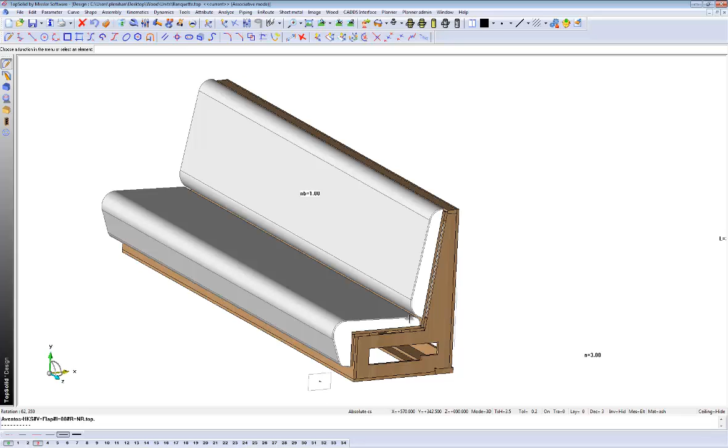Okay, so here I drew up a unit for one of our current clients using TopSolid Wood. As you can see, we've got rails here, we've got upholstery, of course, which you can draw, and it's all drawn in TopSolid Wood.

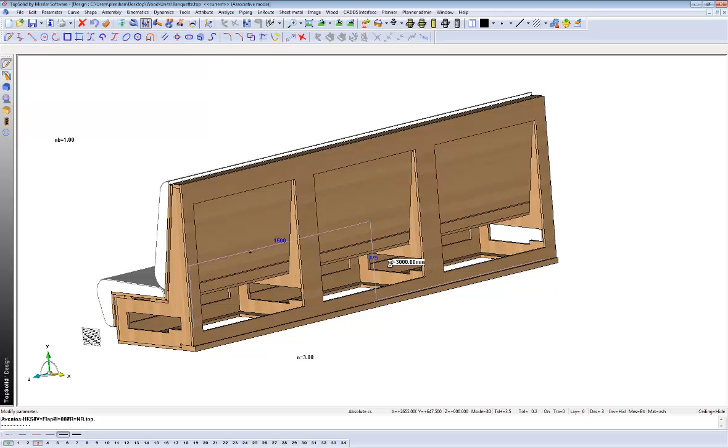Now let's actually make a few changes to this. The client wanted to change the overall width, but also change the number of rails here. So what we can do is maybe just modify this length to 4000 mils, and change it up. As you can see, it changes everything in place and changes it equally, the spaces.

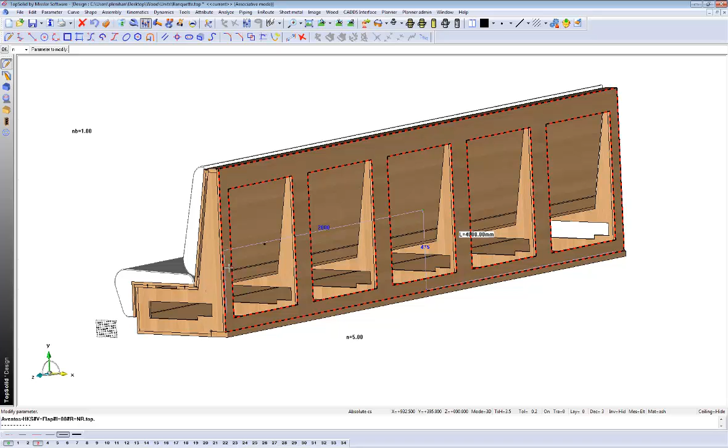What we'll also do is change the number here from 3 to maybe 5. As you can see, it adds in additional parts. That's pretty powerful, that it can actually add in all of these additional parts if you tell it to. This saves a lot of drawing time and also time in making changes to revisions and so on.

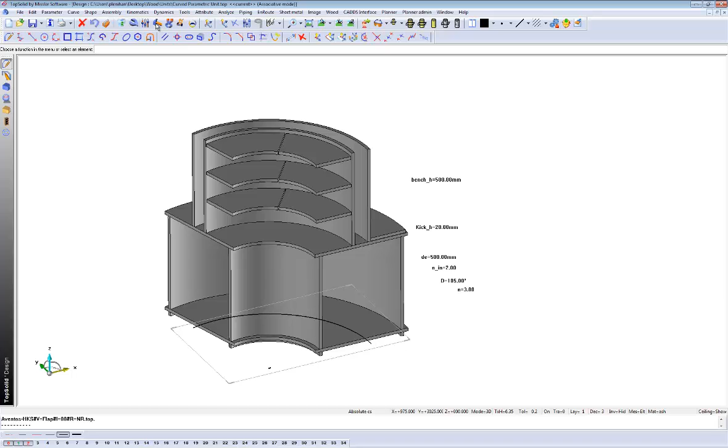Now next what I want to show you is maybe a curved unit here. As you can see, that was previously the unit that I was showing you. Now here, this is my curved unit and I've got different names here. So what I can do is I can click on any of these.

I can change the number here to 4, and again it adds in additional shelves, so I don't have to be redrawing and copying and pasting, and it equally divides the spaces here.

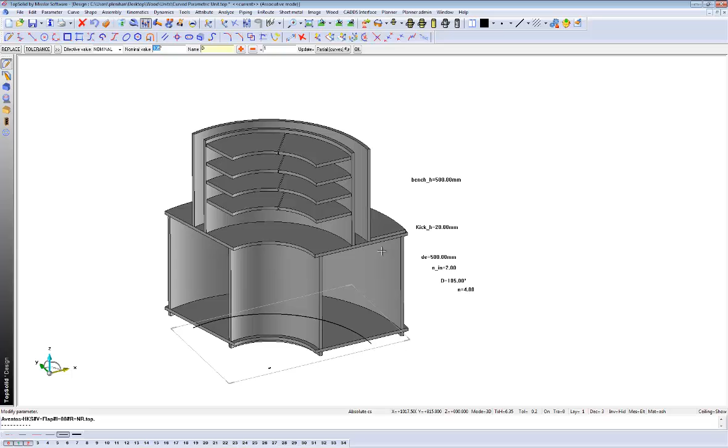So here, let's change the angle to maybe 180. There we go. Big change there. Let's change the number here from 2 to say 3, because we now want 3 shells here, equally spaced.

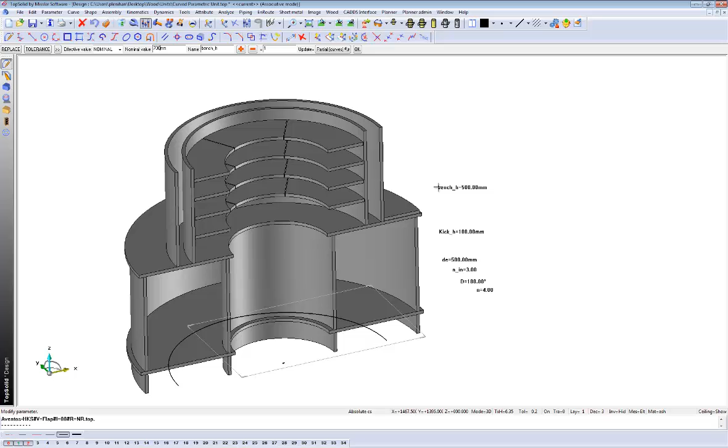Let's change the kick height to maybe 100 mils, as you can see here. And let's change the bench top height to maybe 700. There we go. So it's pretty powerful, the parametric qualities to this. Again, it saves time in that revision process, and also not just that, but it also saves you drawing time because it allows you to add in additional parts.

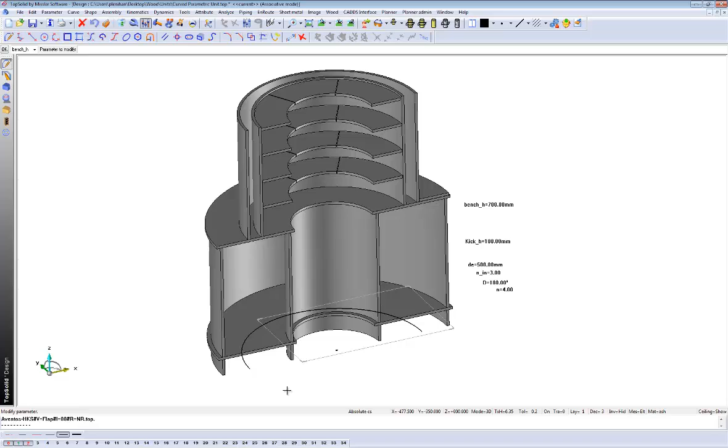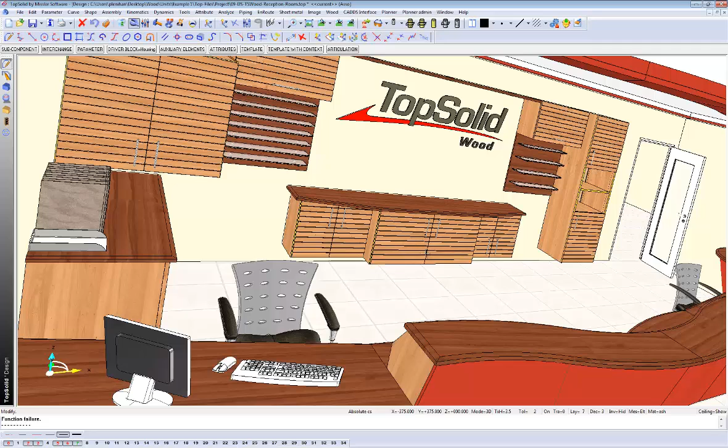Now these aren't just visual changes to the drawing, but if we just look at our see-through mode or wireframe mode, we can see actually the hardware in place also there. So it changes the hardware and also changes the machine.

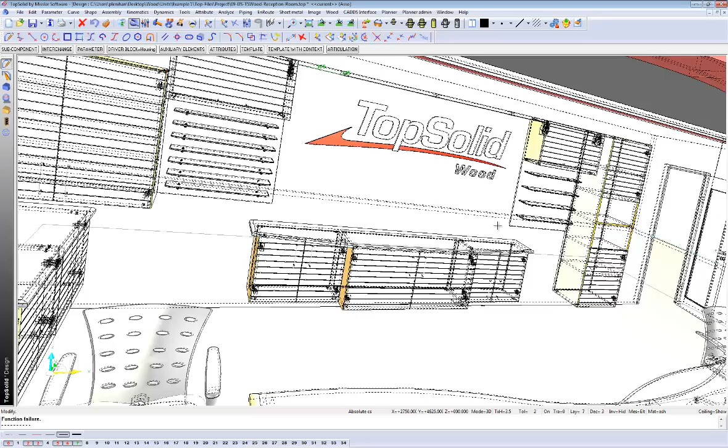What about if we want to make major changes to this drawing? Say for instance, change up the dimensions here. What we can do is I'll just turn everything on here. As you can see, we've got dimensions there. So I can just click on these dimensions and say for instance type in 600 and it will now change it.

Now not only has it changed this side, it's also changed this side because there's a connection between the two. What about this dimension here? We'll type in, say for instance, 750 mils, and it will now change also.

And maybe we'll make a change to this middle unit and we'll say 600 and wait for that change. As you can see here, it's brought it to 600 mils.

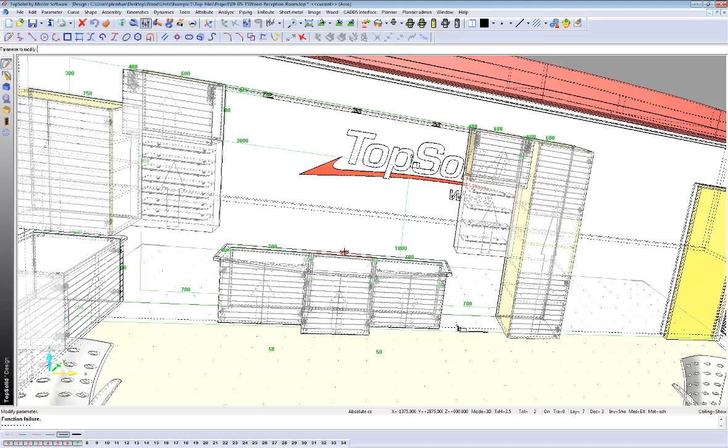Now this is just to give you a bit of an idea of what you can actually achieve with the parametrics here in TopSolid Wood, and how you can make changes, and fairly big changes, to the scene or individual drawings.

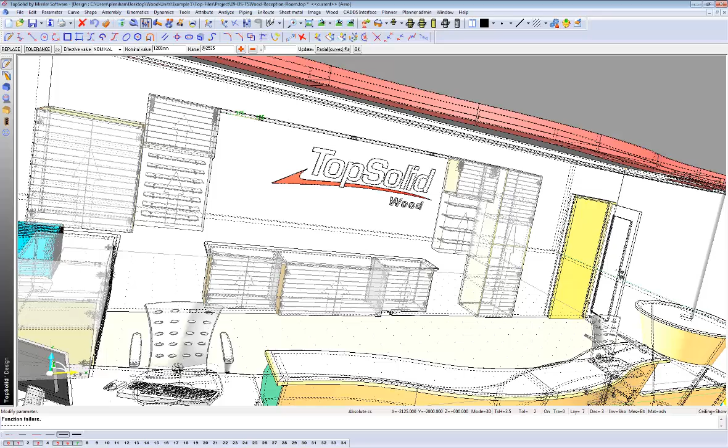And what I'll do is create a rendering. Okay, so let's just zoom out of here. And how you create a render is here. This is our area where we can pick a ray trace, which is a really good rendering. We can create our hand drawing view and various different options here. We can increase the quality and the radiosity here.

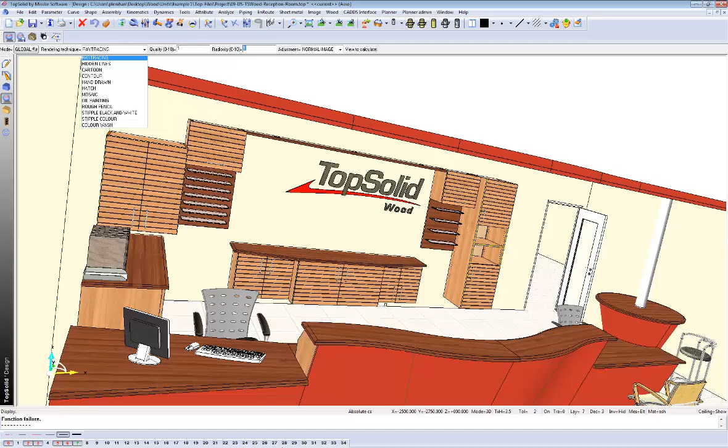Now what I'll do is I'll just open up one of these just to give you a bit of an idea of what you can create. So here, this is your hand drawn, you could say, sketch, and then this is the render mode. So you can create really good crisp renderings that you can present to the client then.

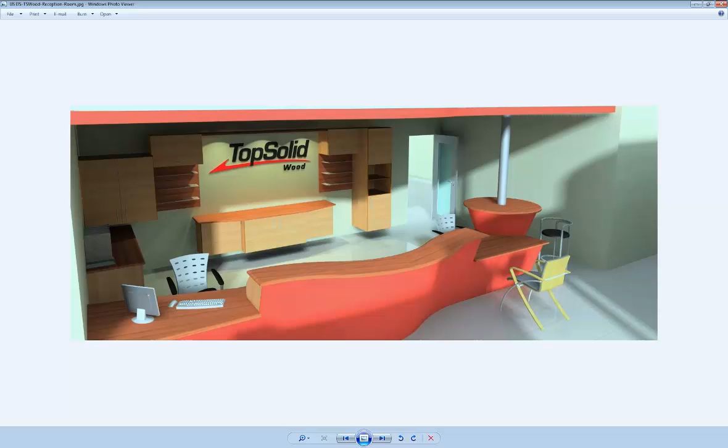Okay, so let's minimize that, and here in TopSolid Wood what we can also do is save as a 3D PDF, and we've got various different file formats here as well, like STLs and SketchUp and AutoCAD and CATIA and IGES and so on. You can see it here.

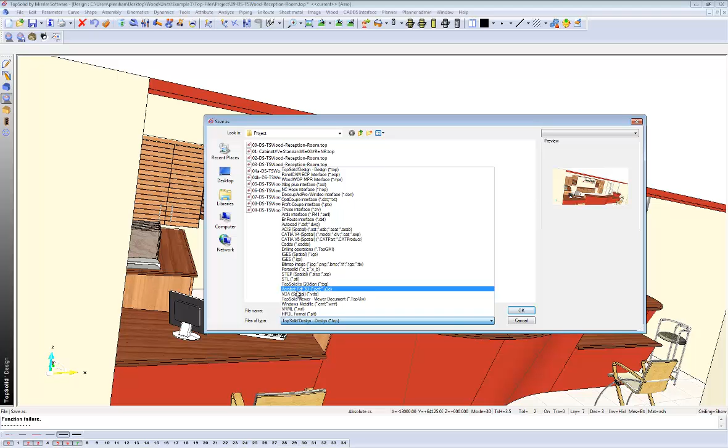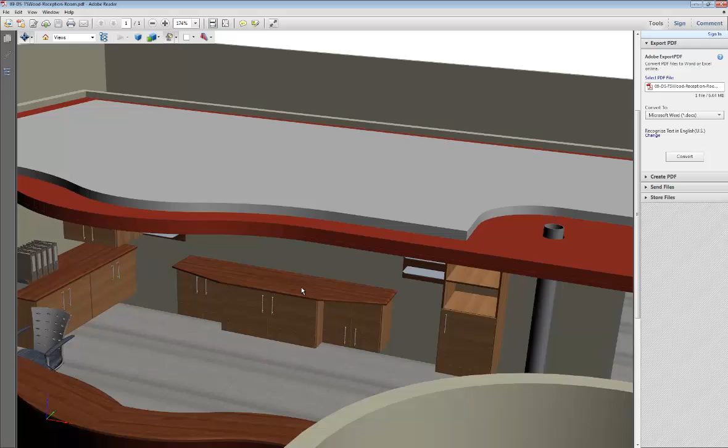But what we can also save is as a 3D PDF. So if we save this as a 3D PDF, and if I just opened it up here, what you can see, instead of the usual 2D PDF that you'd be used to, plans, elevations, you can send this to the client. And here, we can just rotate this, and we can zoom in and see exactly what's going on, and rotate it up and spin, and see exactly what's going on here.

So, if we just minimize that, go back to my 3D model once again. So this once again has been a quick demonstration of TopSolid Wood and its parametrics and its also presentational qualities as well.